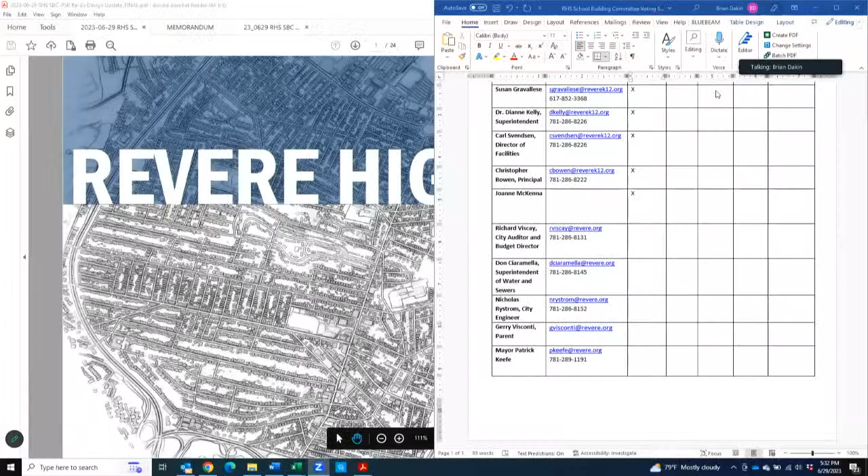Okay, I'm going to share my screen here. I think we might come on and off sharing the screen, but we have a relatively short agenda for tonight. Really just going through a quick recap on the board meeting, and then Perkins Eastman has a design options update. So I think we'll jump right into that.

One of the items that I emailed the committee just tonight was the record letter that I have on the screen here. We will post this as part of the presentation for tonight. And I'm trying to figure out if I can zoom in, but my Zoom controls are in the way. So long story short, what's on the screen here is the record letter from the MSBA approving the feasibility extension request.

This last sentence of the first paragraph is the most impactful part. We are authorized to continue the schematic design and preferred schematic phase that we're in now through June 30th of next year. So this aligns with the schedules that we've reviewed at the last few meetings. It's a confirmation from the MSBA that we're good to go.

And if we want to look at the detailed schedule, we can bring that up. But I'd say that this meeting went very well, and I'm not sure if Dr. Kelly, you had anything to note from the meeting, but MSBA has continued to be very supportive of this process and understanding of the extension. No concerns for me from left field as the OPM at that meeting. Not sure if you want to add anything else, being that you were at the meeting as well.

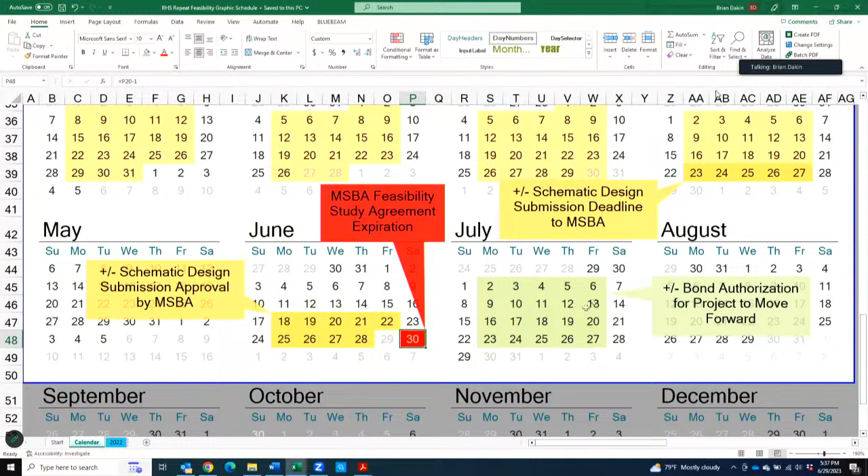Really what that comes down to as a takeaway is lots of updates until we get to about October, November, December. That's when decisions need to be made. Then we proceed to schematic design early next year, get that approved, and that all plots out to a bond authorization vote by the city of Revere next July. So again, no dates have changed. Just wanted to reaffirm this based on the MSBA approving the schedule extension request last Wednesday.

Are there any general questions on schedule or process? Tonight's really a design update centric night. We have no invoices to approve tonight. We aren't planning on going through the budget, but at the July 20th meeting we'll do a more comprehensive schedule update, meeting by meeting, and go through the budget. Anybody have any general questions on this MSBA process? If not, we'll move into the design update.

Brian, I was going to say our next meeting is July 31st. If we could have some sort of short presentation to the council, that would be wonderful. I can put that in with Ashley for you to be the first one to come up and talk. That's perfect. I'm just making a note, July 31st, council, 6 o'clock. Perfect. Okay, thank you.

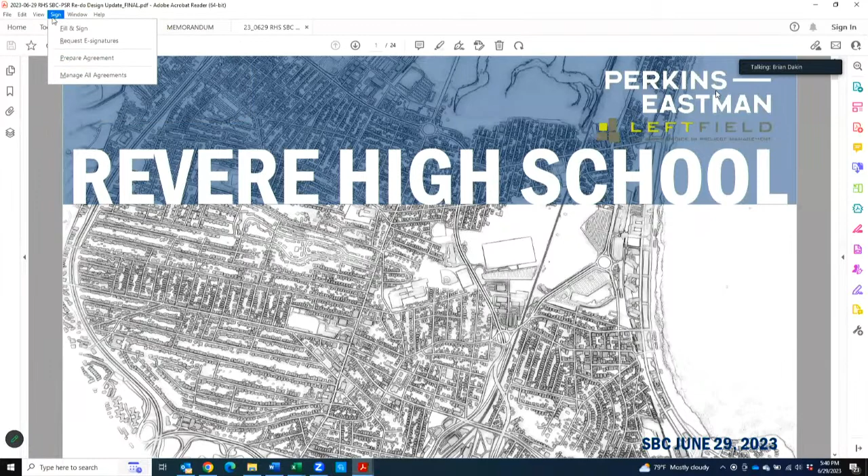So I think we're ready to move on to the design options update. Dawn, I'm ready to drive. Do you want to take over the verbal clicker here? Sure. Hi, everyone.

We are going to start with a working group update. There's a couple slides ahead of it, Brian. If you go to the next slide, it kind of summarizes. There's a lot here, but it was basically, we met last week, the 21st.

Myself and others from our Perkins Eastman team, Susan Gravallese - thank you for coordinating - Susan, Mike Picardi, Rich Galucci, and Chris Bowen. Don Ciaramella was invited, but he wasn't able to attend. So that was the group.

We recapped what we showed at the last SBC meeting, basically the 4 options that were shown, and then shared what we heard: concerns about 6-story academic wings, the possibility of building across the culvert as more of a campus design, and the potential to consider putting the gym at the main level, and how to spread out the locker room, team rooms, and junior ROTC. So we came to that working group meeting because we had a couple weeks in between the SBC and working group with a few ideas, and that's kind of what's shown here - that we came to the meeting having heard the possibility of a campus across the culvert.

We had looked at some options with the gym on the first floor and showed things for the sake of discussion. What we heard from this group was there were mixed feelings about the 6-story design, and there was hope that the southeast corner, the big piece of the triangle on the right hand side up against Route 60, could be filled in, because there's not a lot going on at that corner along the main highway.

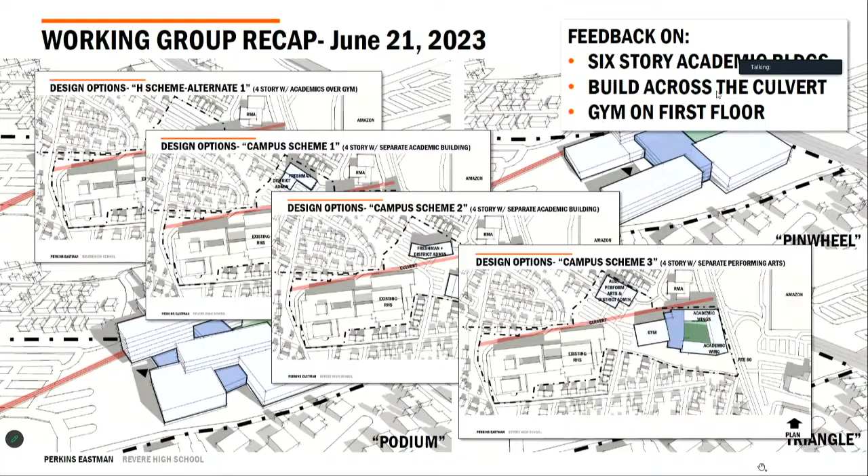I just want to show the evolution. No? Okay. And feel free to interrupt me, by the way.

Can I make one additional comment? One of the things we were talking about, both at the previous building committee and at the working group last week, was this conversation about where locker rooms should be placed in relation to the gym. I said I would connect with our athletic director as well as Carl, who I think is on this call, to talk about how there's some state guidance on how supervision needs to happen in locker room space, in response to state initiatives to prevent hazing in high schools and athletic programs.

I wanted to update the group on that, because as we think about these models or different designs, there's the idea of having the gym on one floor and locker space on another. I just wanted to check, is this an appropriate time to share that, or is there a better time later? I just want to make sure I'm circling back, like I said I would.

Yeah, no, I appreciate that. I was hoping you would chime in, because I knew there was further communication we needed in order to understand it. If you want to go ahead and give us the background on that, there is one option I'll show tonight where we look at moving those lockers and team rooms over next to the gym. It would still be a 2-story connection because there isn't enough footprint to get it all on one big floor on this piece of property.

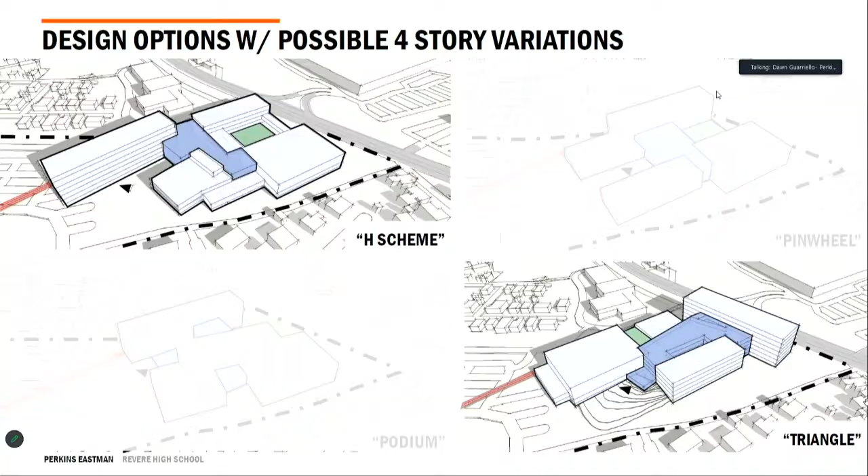We have 2 views looking north and south, just like we did last time, for each option. The other thing is I zoomed out to see the whole site.

We start to show bits of green where the fields would be loosely laid out in these. Next step is to get the site, civil, and landscape involved if we're able to narrow some of these down. And lastly, I changed all the shadows to be December 21st at noon.

So those are some of the changes. Up in the left, you can see the previous version.

Dawn, sorry to interrupt, but December 21st being the worst day of shadows in the year? That's correct. Yep, the lowest sun angle, for lack of a better way to put it. Exactly, I think the previous one was like late November, but I moved it. Our software allows us to do that, so thank you for that comment last time.

In the upper left, you can see the previous version, which had the 6-story 10 through 12 academic on the left side, and the freshmen on the right, still that way, except we took the top 2 floors and put them over the gym building. Maybe not ideal academically, but it would connect through that part of the school at the uppermost floors, bringing those levels down instead of a 6-story academic wing.

Acoustically, we'd have some hoops to jump through with gym noise and being above some of that, and where the locker rooms go and don't go will factor into this. But it's a version where you could take some of that 10-12 academic space and spread it out along the heart of the school to the southeast, and bring that overall level down.

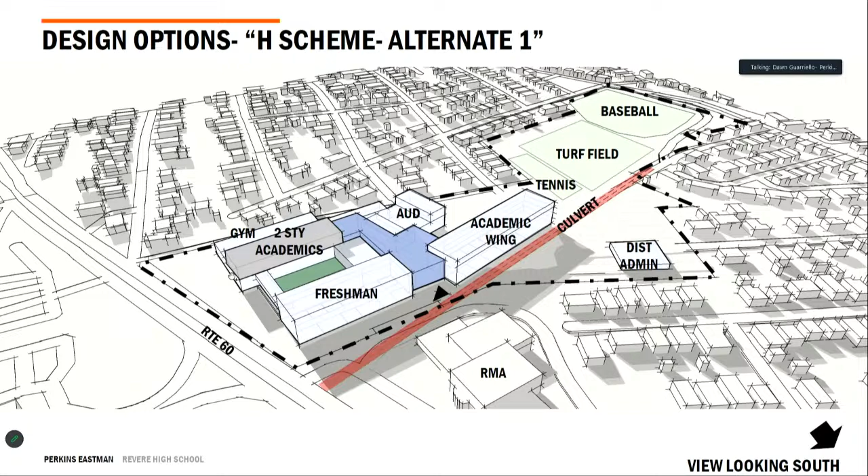If you go to the next one, it's a version of the triangle I mentioned at the last meeting. You can see on the upper left what we previously showed: the 10-12 paralleled Route 60, and the Freshman Academy was at the south. This is the one that kind of broke our north-south facing classroom rule, but we leaned into it.

The gym is closest to the fields, and the auditorium backs up to RMA, which I think could be a benefit for their use as well. You can see we show the district admin across the culvert.

But the changes we made were a lengthening of the 10-12. In the previous scheme it was 6 stories. We lengthened it pretty much the length of the property, then connected it to the Freshman Academy. Previously they were disconnected with an entrance at the heart of the school. What we felt was an L shape of the 10-12 connecting to the freshmen, with some breaks in that facade, could work academically and allow us to bring everything down to 4 stories from 6.

So this was a reaction to: could we use a little bit more of the available site in this scheme? Could we reduce the 6 stories to 4, and what does that look like? Again, the fields are kind of where the existing building is.

You can see here from the RMA, above the RMA, the school avoids the culvert as best we can. We've got the central or district admin across the culvert, standalone.

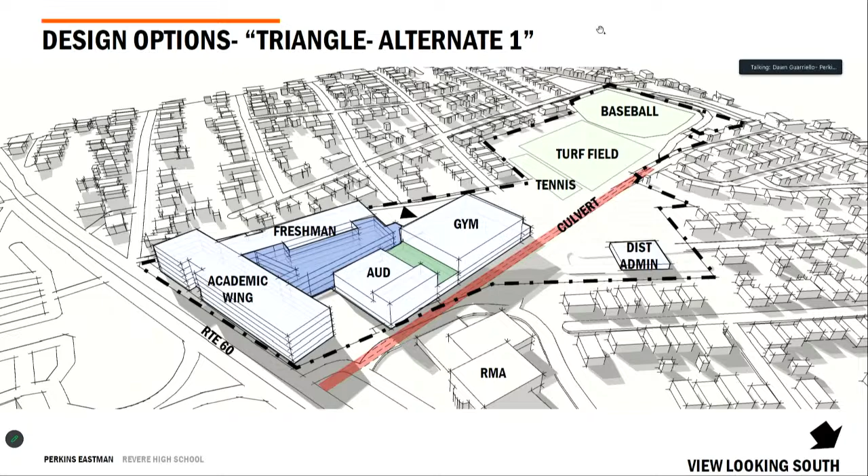So we're calling this the triangle alternate one, just so - the H scheme and the triangle have alternate schemes that are basically iterations of what you previously saw.

Hey Nazra, I see that you're on. We had talked about Nazra possibly talking through these couple of campus options - is that something you want to do, or do you want me to keep going? Either's fine, you can keep going, but I'm here if you need me. Yeah, hey, good to see you.

Okay, so building on Dr. Kelly's comment about could you build across the culvert - what does that mean, what does that look like? Does that support the more campus feel that was part of the original design goals, to really create an entire campus? So we looked at two possibilities of breaking off pieces of the building that we thought could be standalone or separate buildings. In this case, what you're looking at is the Freshman Academy with the district offices across the culvert, and yep, so it's 4-story.

Freshman academy. What we talked about internally with our design team was, is there an alternative gym and cafeteria with a satellite servery, and part of the media center and tech space that can fully support the freshman academy, so they come to the main building only as needed for specials, electives, or other parts of their day, but for the most part can be supported as a freshman academy. Those are things to consider. We're not necessarily showing all that as program right now, but those are ideas we were floating, saying how true of a freshman academy is this.

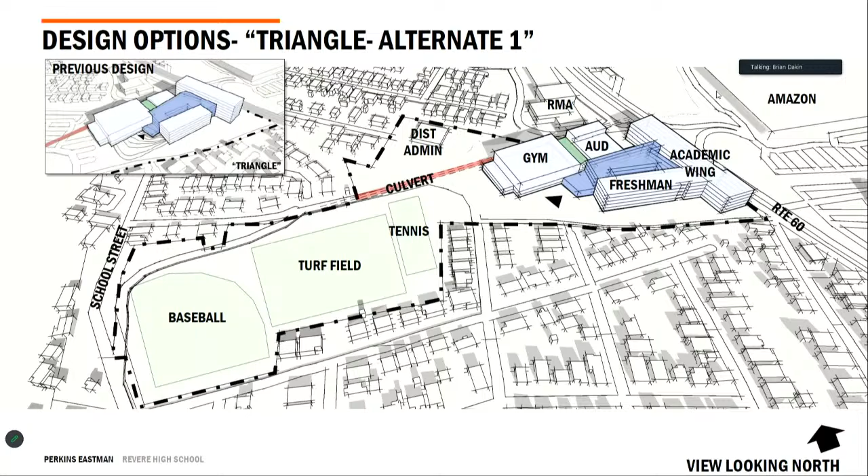I'd add one other thing compared to — I'm going to click backwards for a minute, so I hope I don't get anyone dizzy. These first few options that take away the 6 stories, but beef up parts of the building to make it 4 everywhere instead of going up to 6 — you can see that more or less these first few building options are on the 2 fields behind the existing high school. I'm going to go back to the other one as well; this one encroaches a little bit.

One building, one construction site — put a fence around it, we build it. If we're looking at an option that separates the building, we're going to have to get into a more complex discussion about phasing. This would mean taking away existing parking on the site to build the separate building, which means we'd have to put it somewhere — most likely Ambrose Park, potentially other places.

But I just wanted to say education drives the bus here. There is going to be an added cost for having a few different buildings, mainly because of square footage, redundant mechanical utilities, building envelope, and also the temporary phasing costs of having to come in and out of where this construction site might be. So I'm going to bookmark that.

As we get into the last 3 options I might reiterate this a little bit, because the option you'll see in a bit that maintains the field house has similar concerns. But just so folks understand going in — there's probably a cost premium for more than one building, and there will always be a cost premium. If we can stay out of the backyard of the existing school to build this, there are certain schemes where we might not need to put temporary parking on Ambrose Park. But if we're going to build right out on the parking lot, we certainly will. Just wanted to note that for now.

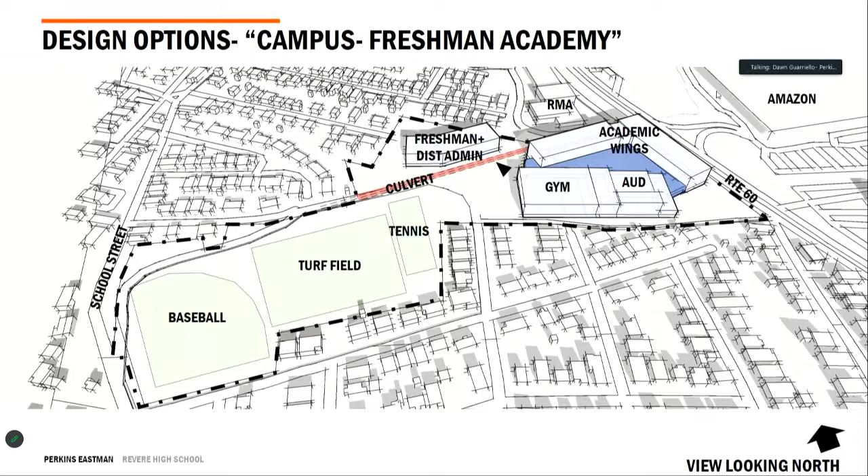Maybe it was this one. Nazra, you might be able to help me because she laid out the program on this, but some of those spaces spilled out into the more academic wing because it needed to be one story.

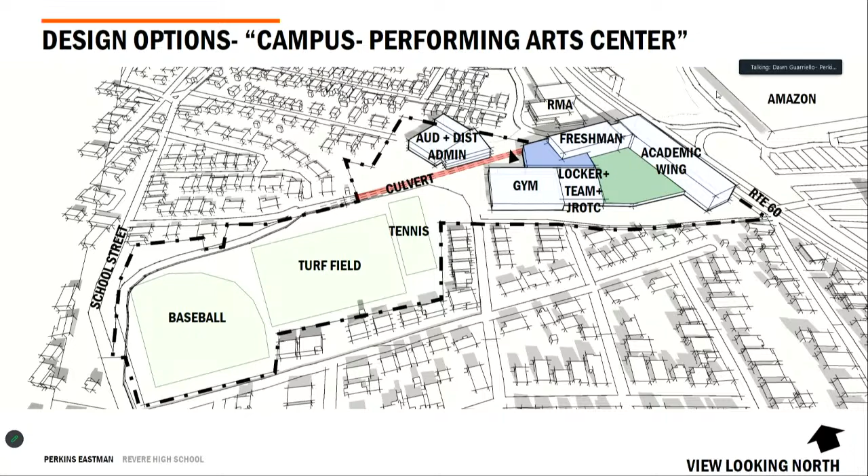That's part of the reason we showed floor plans last time, because it's helpful sometimes to see where some of those connections are made, and we can get back to that the next go around. If we say these are whatever schemes we like, then we can dive into that level of detail because we've done it. It's just that looking at it in massing and then plan sometimes is a little much.

Just knowing that it's not lost is good reassurance. That's all. Definitely not lost. Yes, thank you for that, Dr. Kelly.

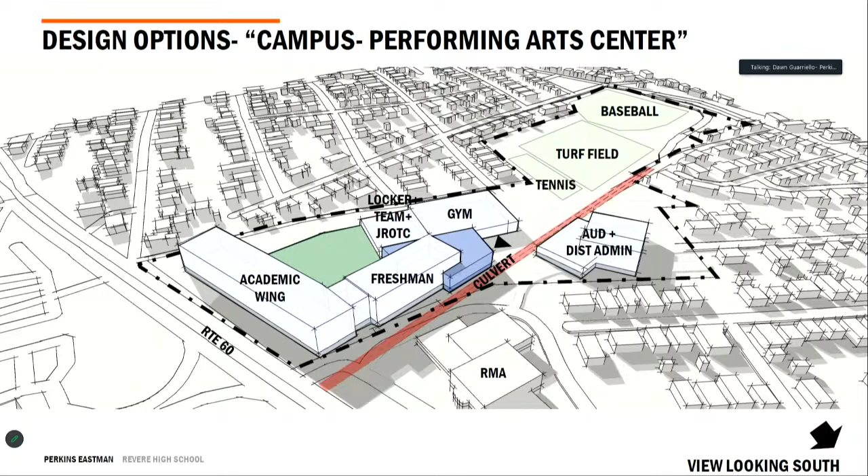And that's true for all the schemes, not just this one, just so I'm clear. Okay, so that's the campus performing arts. So we had a campus freshman, campus performing arts. These last two highlight some possibilities of keeping the existing field house.

We know that it's larger than the MSBA would otherwise allow if we built it new. We do know there's complexities in trying to keep it, both bringing it up to code, and when we would renovate it and still be able to provide physical education to students of Revere High. Logistically, it forces us to connect the building at the tightest part of the site, like if you think of it as a bow tie, we're at that tight part.

But we went back and dusted off some old schemes, looked at what could be made better, and came up with this, which is mostly one story. We do have the performing arts across, similar to the last scheme. The heart of the school becomes very linear because we try to connect that existing field house with the new academic wings, and it gets pinched at that point, but that could be where some of the more public spaces exist in that dark blue heart of the school.

It separates the fields. The two Article 97 components, the baseball and tennis, are on the west. Turf is on the east, up against the roadway, and definitely builds on the tightest part of the site. But we thought it was prudent to reconsider, because we figured we'd be asked, did we consider it? We've been tossing it around, so we should look at it.

So here we are, the academic wings, I think we were trying to keep those to four-story. One might be taller than the other in the scheme, but Nazra and I were talking about the program spaces and think they might even get a little longer if they have to. I think she's showing three and four here, but programmatically I think we need four and four. The heart of the school can connect that, and then there'd be a pedestrian access over to the performing arts and district offices.

What that would do is force a connection at 60, right, to come along this east side of the building for a drop off, and then something off of the School Street access to the west. So there would definitely have to be a disconnect there from a vehicular standpoint.

Thoughts? Looks really tight. Yeah, I know it is. It definitely is, Dr. Kelly. This is where I was going to just try to...

OPM wet blanket for a second. I want to reiterate, education and decisions about the school drive the bus here. I also want to mention what I mentioned when I saw these drafts from the design team the other day. I appreciate the follow up on this. It's an idea that definitely needs to be explored, and I think the design team did as good a job with this, and the next option, the final option you're going to see.

However, from a how-to-build-it perspective, I hate these options. I'm just going to say, usually I said that to Dawn the other day. It's okay. Simply, how we would sequester the existing building from building up against it is very hard. It's going to be more impactful than building over on the turf field. How we would reconnect streets and get around this building, very hard.

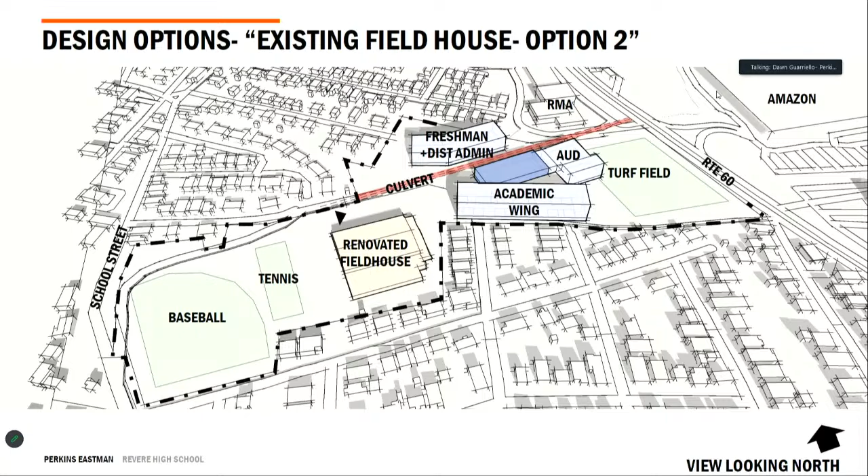And then across the culvert to the freshman academy, of course, in the renovated field house, which, to Brian's point, is keeping the structure basically and rebuilding everything else.

Not a lot of savings here, but the potential to have it be more of a small campus feel. I think Brookline High has something similar where they have different buildings, and there are definitely some precedents out there—Wayland might be one of them too.

But all of the new options we tried to show today take that height down, just from hearing the feedback from the previous meeting, so we haven't forgotten about that. We definitely will have those conversations and connect Revere folks with those towns or cities if needed.

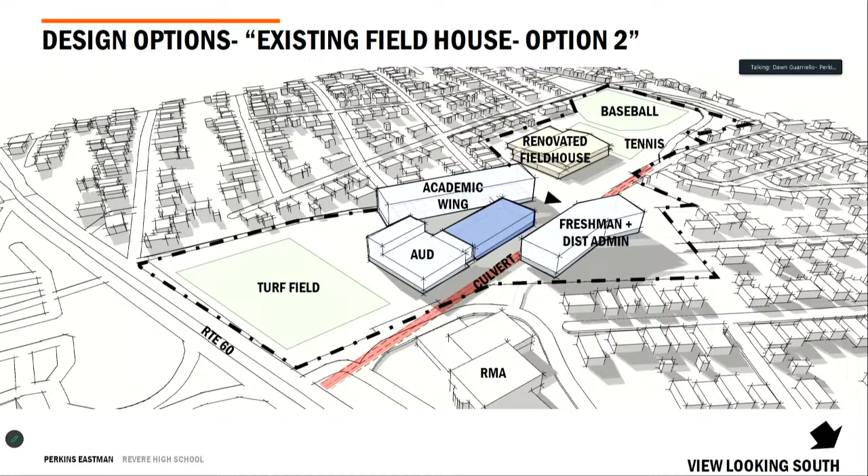So, if you want to go to the next one, Brian—this is the slide that recaps the previous four from last meeting, and then I did a recap of the six you saw today, which are vertical. So the left two are the alternates, alternate H and triangle. The middle is the campus versions with all new construction. And the right hand are the ones that try to keep the existing field house and then build new for the rest of it. This was really just a cheat sheet if folks wanted to talk about different ones and compare.

And I think that's a good reminder, Dawn—as we go through July into the next meeting, I'd like the committee to focus on concepts. Is the concept of retaining the field house and spreading the building out a valid concept or not? If it's not, both options die. Is the concept of separating the building—whether it's the academic wing, which I think we heard tonight is not preferred, or maybe just the performing arts—a valid concept?

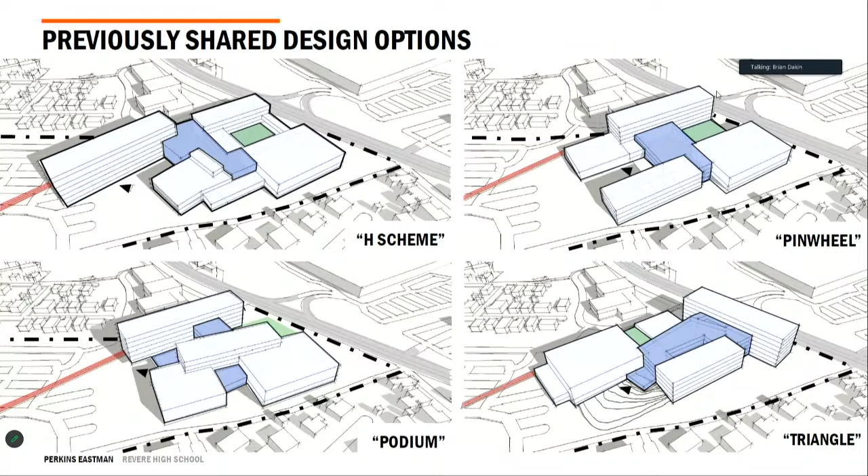A 6-story option, which is what you're seeing on the screen now, has a little less footprint. You'd end up with a little more site, a little easier to build, but I'm not going to push that on everybody. Or a 4-story that takes up a little more space, versus separate buildings, versus keeping the field house and attaching the buildings to some degree.

So that's what I'd like folks to be focusing on, at the point that we're eliminating some of these things and highlighting others. Dawn, you might have different ideas.

I'm thinking I'd like to let everything that's been presented at last meeting and this meeting sort of marinate through the next meeting, and I think it would be nice to revisit this then. There'll be another couple of meetings with the site working group that may enlighten this further, especially traffic circulation. I'd like the July meeting to be one where we can at least decide: should we still study keeping the field house and doing some sort of renovation?

Yes or no. Would you like to be on both sides of the culvert? Yes or no. We don't have to get down to 2 or 3 options, but getting down to 1 or 2 concepts, with maybe one option each, would be awesome at the July meeting.

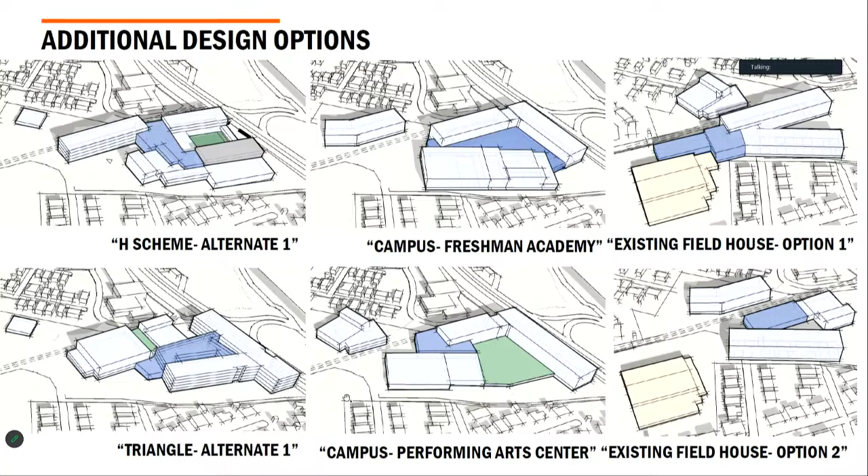I agree. Well, in the interest of making sure Dawn's time is used valuably, I would suggest that we eliminate the existing field house options where the buildings are stuck in that bow tie that's just too tight to have roadways or anything else. So I'd make a motion that we eliminate those two.

I'll second that motion. Okay, hold on one second, I'm going into meeting notes mode. I'm going to unshare the screen for a second because I need to find where to type this.

Sorry, that was Dr. Kelly. Motion to... I'm going to say a motion to eliminate options. Sorry Dawn, were there... I'm going to call it eliminate existing field house reuse options.

So, just for clarity Brian, could we frame that as eliminate the options that squeeze the building into the narrowest part of the site? Because that's really what makes those options unattractive - it's not so much the field house, it's the disconnecting of the campus, because you can't get through.

Got it. So how about: motion to eliminate the existing field house options that locate the building in the central portion of the site and divide the campus into two portions. Does that sound okay? I can reword it any way possible. Let me dictate it to you: eliminate the options that force the building into the narrow area of the site.